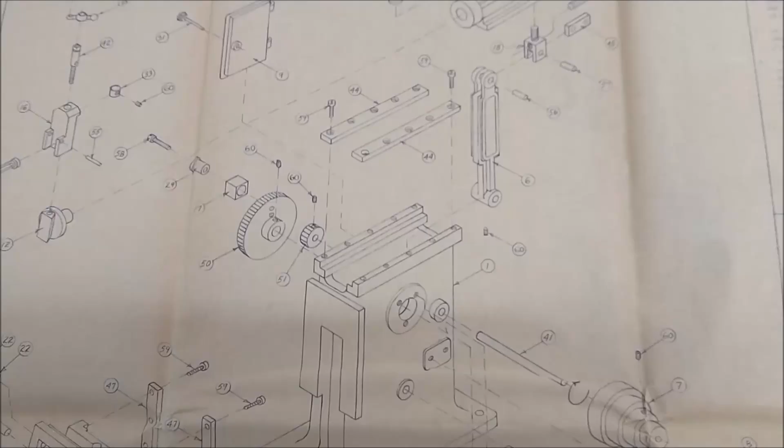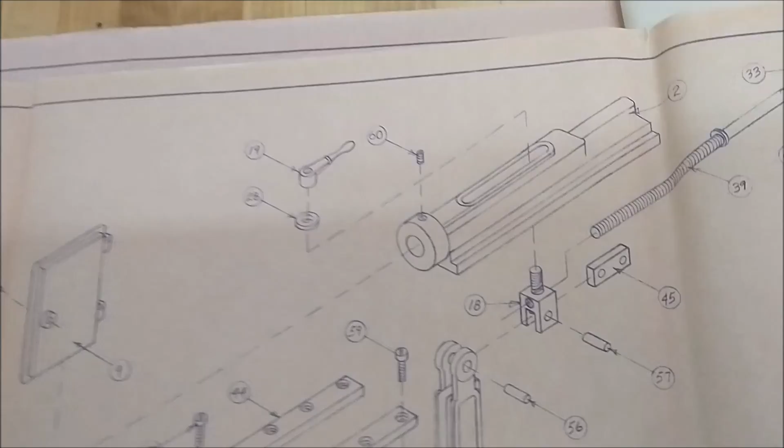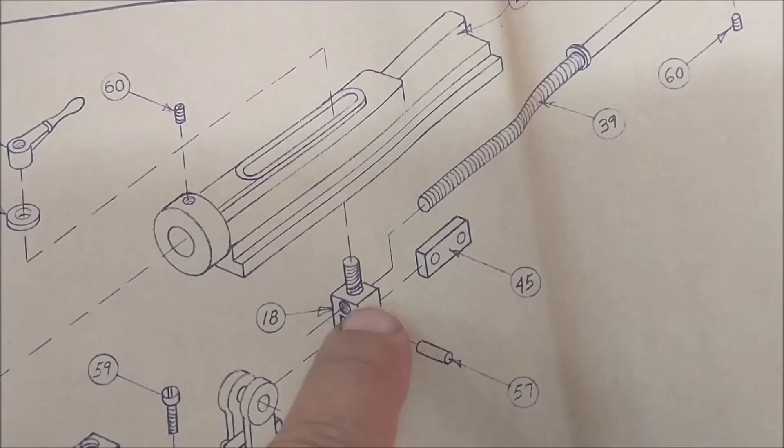With all of the crank arm linkage, all the gears, everything needed to make this piece go back and forth, we need to do something to tie this to that, and that's all this little stuff right here. I think that's where we're going to go next. First piece I'm going to do is part number 18. It's part of the ram linkage, made out of brass, 1/4 inch square, with a 5-40 thread through it and on top. I'm going to set that up in a vise, do the cross hole and the slot and this hole first, put it in a collet, and we'll turn and thread this on the lathe. Let's do it.

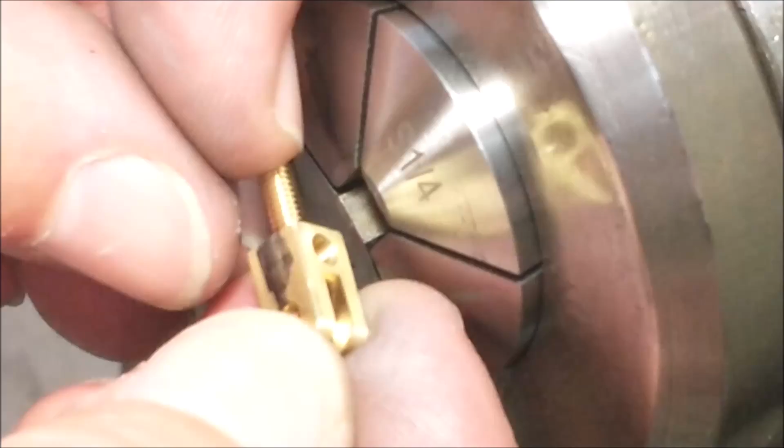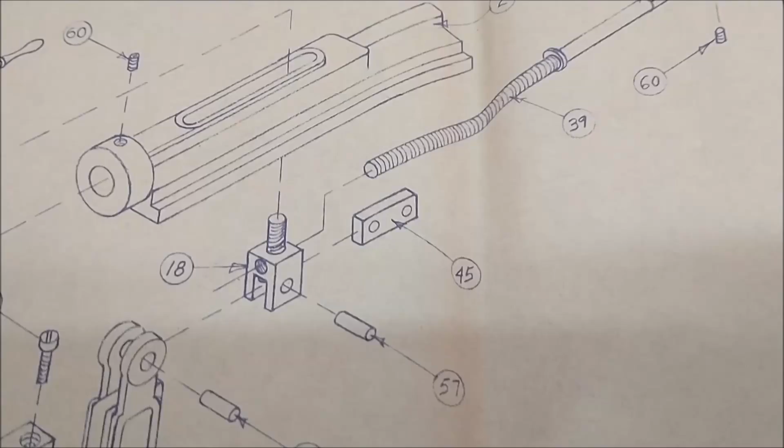Next piece in line, number 45. It's the link. Not a very complex part, but it does present a couple of holding difficulties if you want to do it all at one time. I think you're going to like the way I do it. Let's take a look.

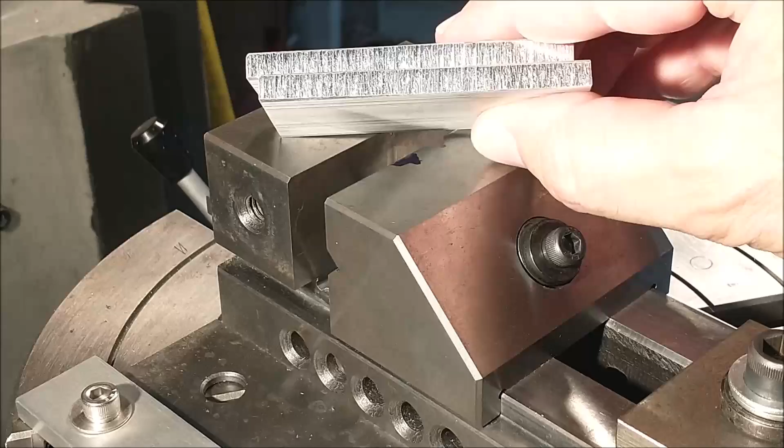To do this little part, I'm going to make some more soft jaws. You've seen me do this before on other projects, but I'm going to do this a little differently because I want to hold the part a little differently. I want to machine these so that when they're machined, they're just a little bit below the surface of this vise.

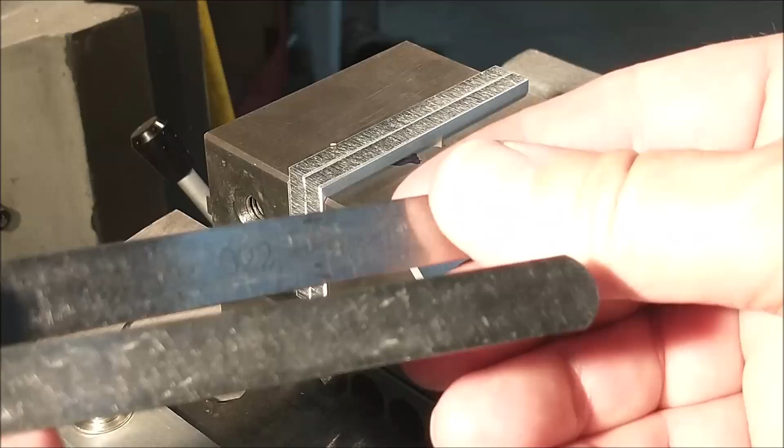I'm going to do that by using feeler gauges. One's 22 thousandths. I'm going to put that underneath the parts. Let's torque down on them now.

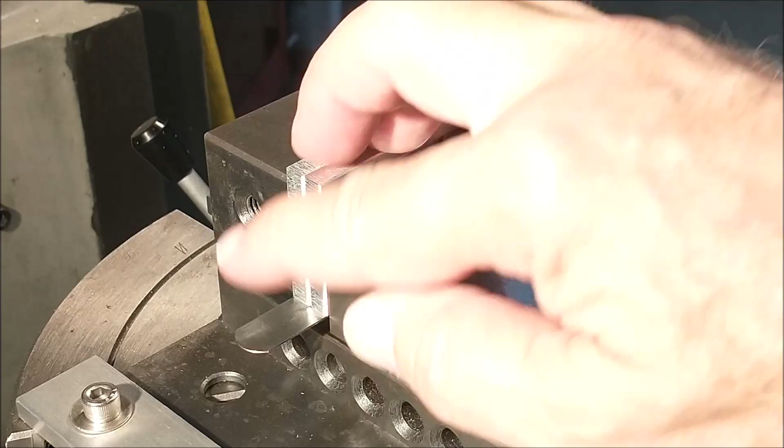By doing what I just did, I effectively know that this surface, when I pull that parallel out, is going to move down 22 thousandths of an inch. I'm going to take the 20 thousandths shim and set the height of the cutter I'm going to use to deck these off with the 20. So when this is done, it'll be 20 thousandths above this surface. Open the vise, pull the shim, and the top surface will now drop to 2 thousandths below this surface. Easiest way I know how to do it.

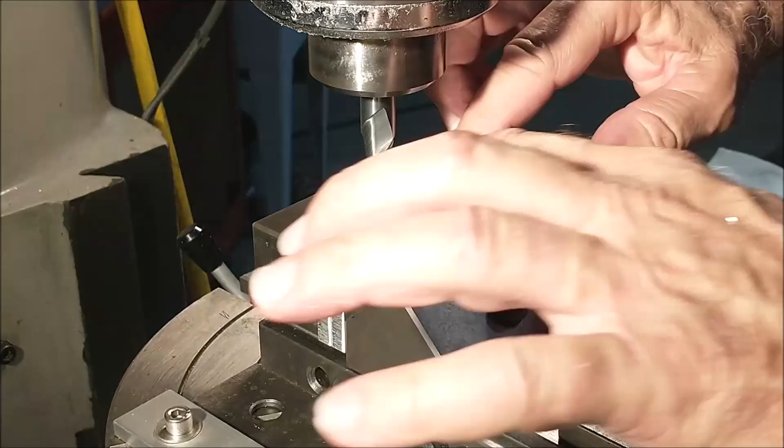Let's pull out the 22 thousandths shim on the bottom. I will remove these and deburr them, but just for sake of demonstration, at this point, let's pull the shim. The surface of these two parts is now 2 thousandths below this surface right here, and you can trust that. That's important in an upcoming shot, so bear with me for a second. I got to cut a little piece of material to squeeze in there. I'll be right back.

After a little deburring on the surfaces I just cut, I'm going to put them back in. Open the vise. A little bit thicker than the part I'm going to stick in there. This is the part I'm going to stick in there, but I have to drill through it, so parallels are kind of out of the question. I could put a step in these jaws, you've seen me do that before, but I'm going to do this a little differently.

Magnet. Doesn't get much easier now, right? It is now level with the top and front and rear jaws. These are out of the way. It should be straight, and as I close it up, the magnet slides. All is well. The reason these are lower than the jaws is so that it doesn't pop open if the pressure is above the clamping surface. You only need a couple thousandths of an inch, so there you go. I'm going to squash down on it. Oh, take that out. Now I have a part that's sitting in there perfectly flat and level.

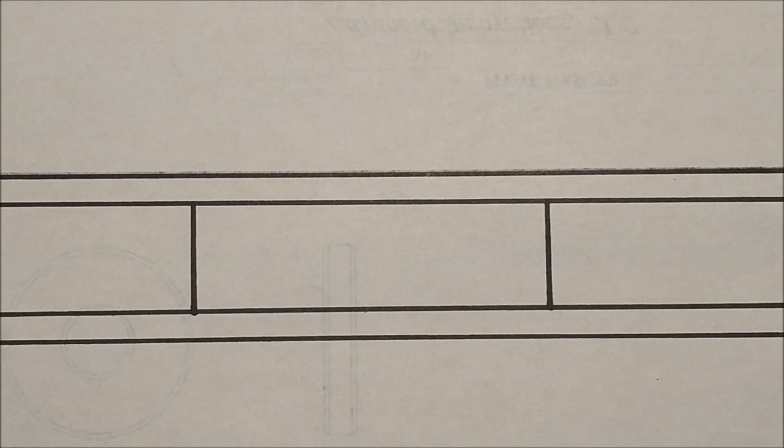There's the part. Once I put it in and positioned it with a magnet, I know it's flat. I also know it's oversize in length. So when I come in and hit that part with my end mill, I'll put a 0 on my digital readout. If you don't have a digital, put a 0 on your dial. Right now, let's call this X0.

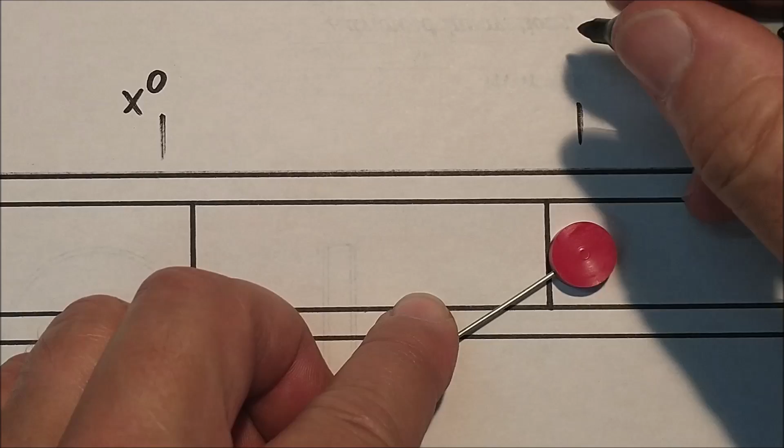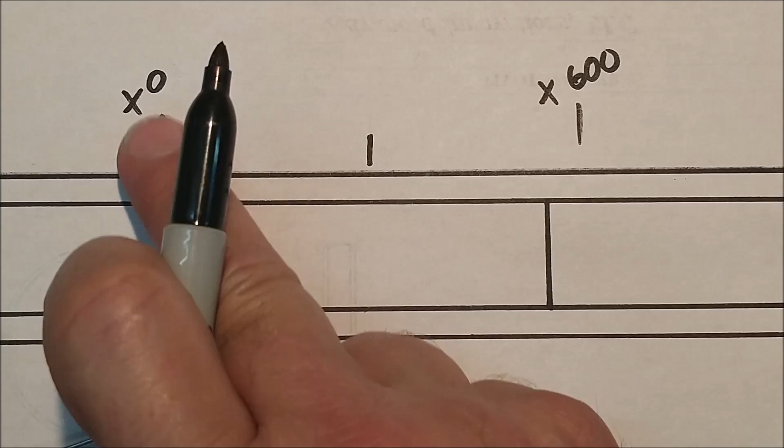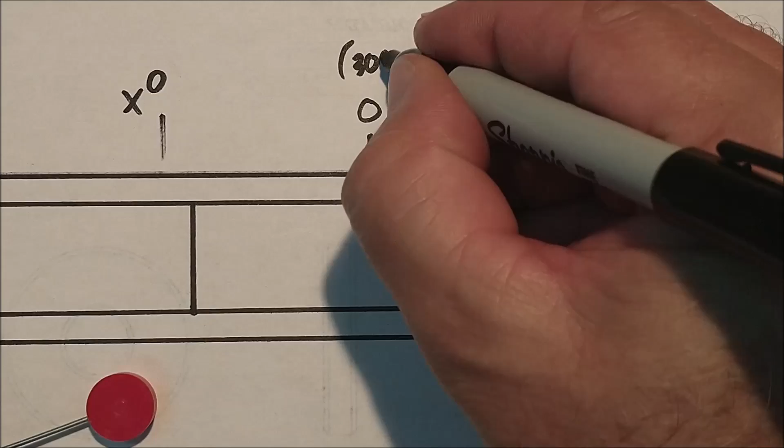When I move over to this side and touch it, let's say this is now X600, for lack of a better term. I know that X300 is right in the middle of this part. The centerline feature on a digital readout: when you hit 0 and come over, a second value shows up, and hitting the centerline automatically zeroes that point for you. If you don't have a centerline feature, crank it back to half of what you've got, and now you have your 0, or the 300 point, in the part. That is the center of the blank along the x-axis, not the y-axis.

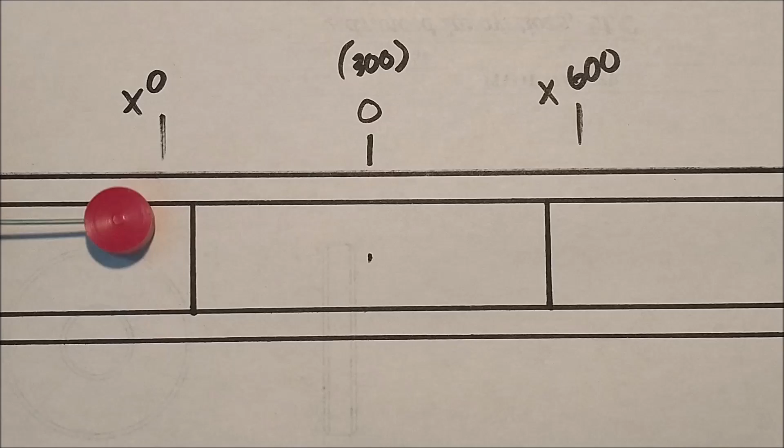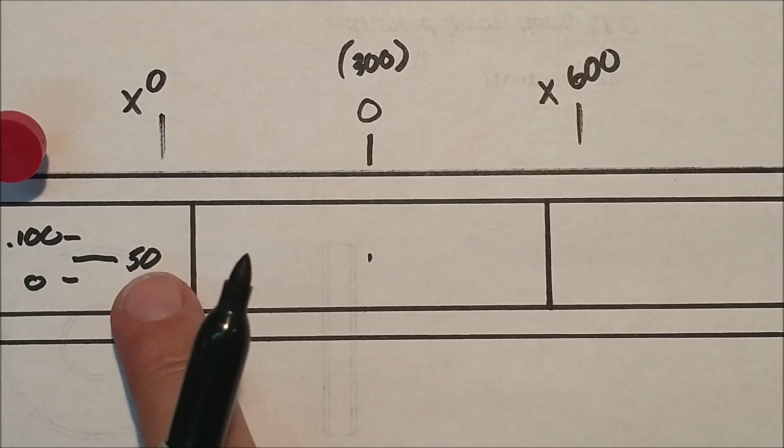Now, since I had aluminum nests in the jaws, I was able to take a bump and a bump and a bump. Let's say the bump here is 0, and the bump here is 100. I come back to 50. I could also use the centerline feature for the y-axis, which now makes this 0. And there we go—the center of the part is now located without ever having touched a piece of measuring equipment.

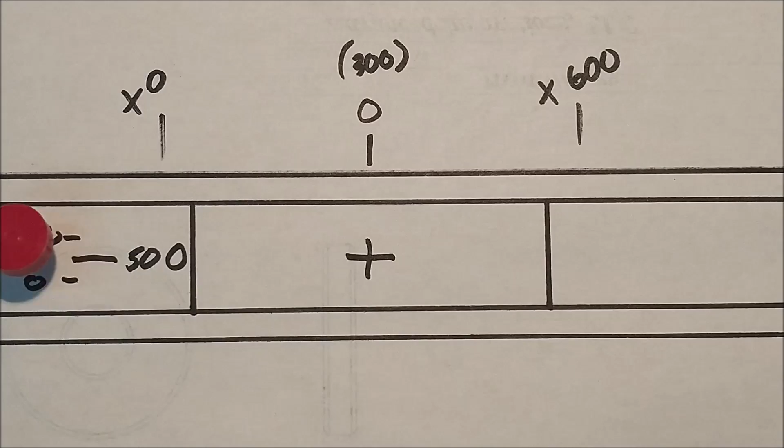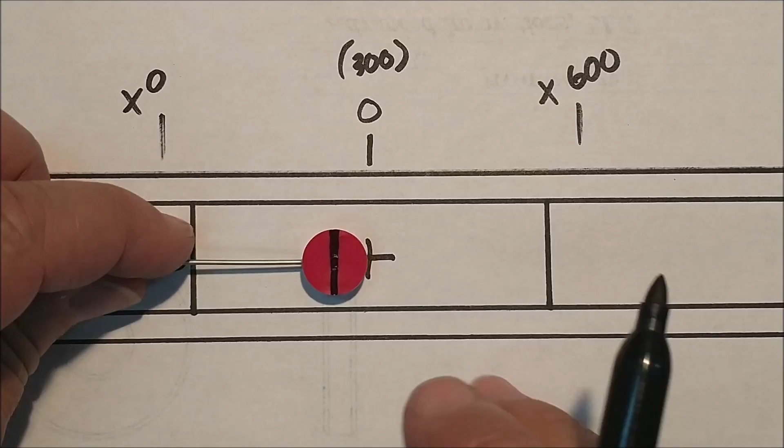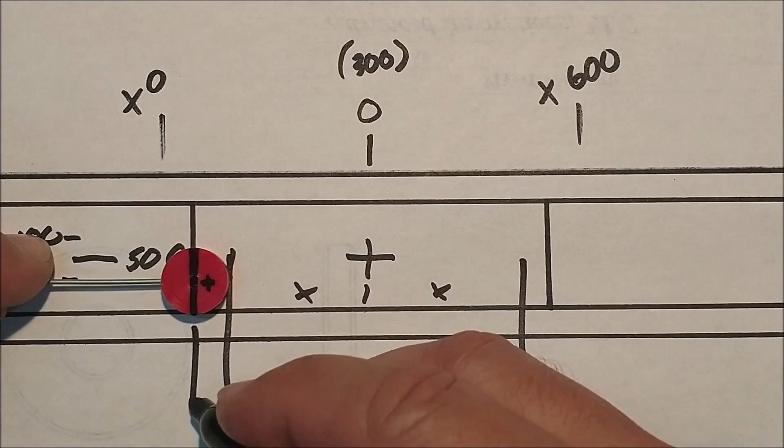Now, by knowing the center and the radius of the cutter, I'm going to draw on this—look at that. You take the overall length of the part, which is here, half the part plus half the cutter, and these are your new values. When you make the cuts, the part will be to print.

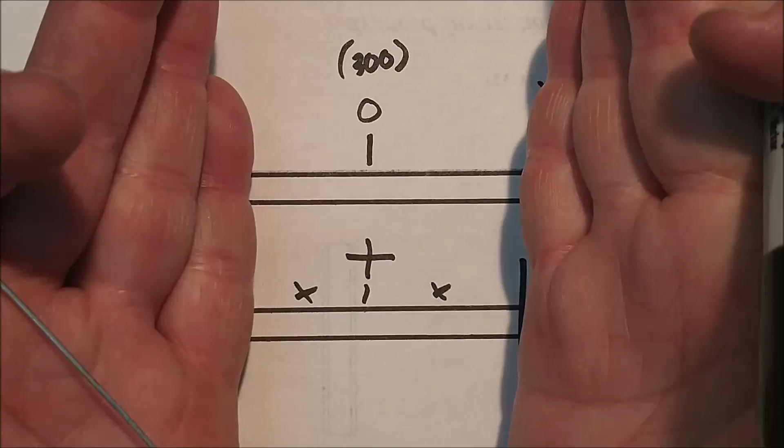Additionally, with your 0,0 having been determined by bumping the nests and bumping the end of the part, not only is the part to length once you know the diameter of your cutter, but you can use this location as the central reference for the offset for the two holes. And since it's suspended between two aluminum blocks, you don't have to worry about encountering any parallels below the part.

So if you don't have a sacrificial piece of aluminum or something under this to drill into, the magnet gave you the flat, and the aluminum gives you the ability to saw, cut, or mill the ends off to length.

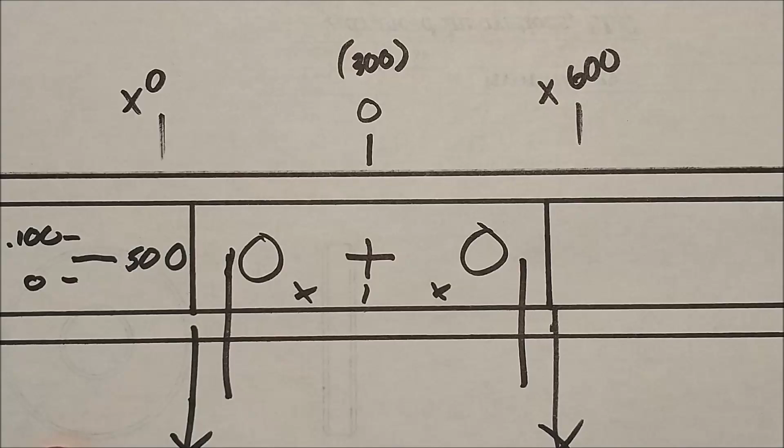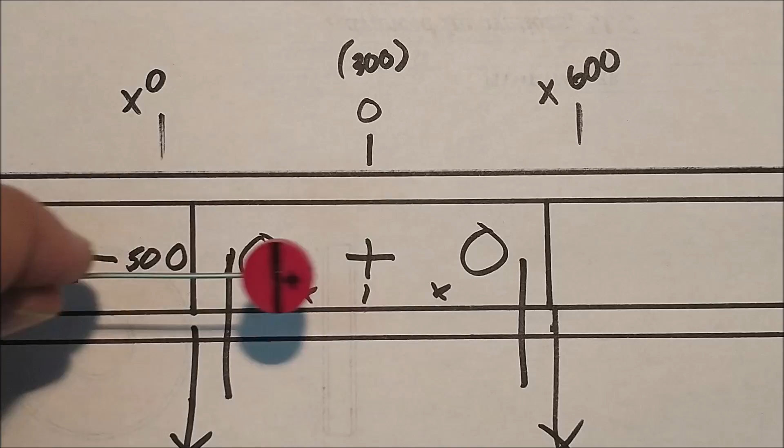All right, now that everybody is completely confused, you can roll that back and look at it again. Bump, bump, center. Bump, bump, center. 0, 0. Mill, mill. Drill. Done.

Camera is now behind the machine on the left-hand side, so I'll be standing on this side of the cutter. What I'm going to do is take this cutter, bump each end, set a number, come over here and bump that one, hit the centerline feature on my digital, and that'll give me the middle. Knowing the diameter of the cutter, I can offset equally and come up with the overall length of the part based on the cutter diameter.

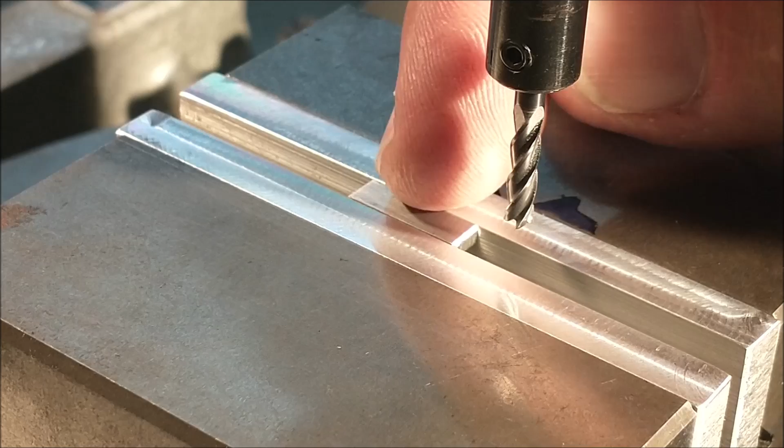So I'll add the radius both ways, or half the overall length both ways, plus the radius of the cutter, for my offset to give me the length. I'll probably do the same thing for the inside—just touch the jaws front and rear with the cutter, zero out, find the centerline, and complete the part without ever measuring it or touching anything. Just cut the part.

Overall length of the part is complete. I'm going to bump the insides of the jaws to set my y-axis 0, and that'll give me the centerline for the drilled holes.

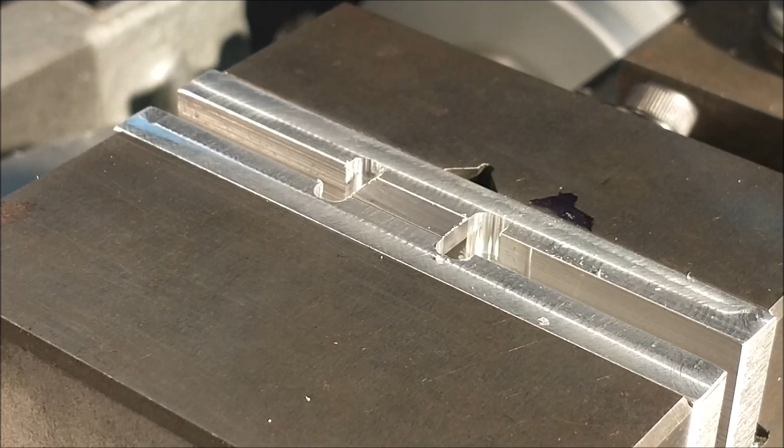Now, I was asked recently about the speed differential between drilling and reaming. For the record, when I'm on the mill and I've just drilled a hole, all I do is throw my machine into low gear to ream it. I don't mess with the speed range at all. It's worked really well for a long time, and I'm not going to change my technique now.

So no speed differential on the dial, just going into low gear for this. On the lathe, I usually cut the speed in half. It's just easier on the high-low on the mill.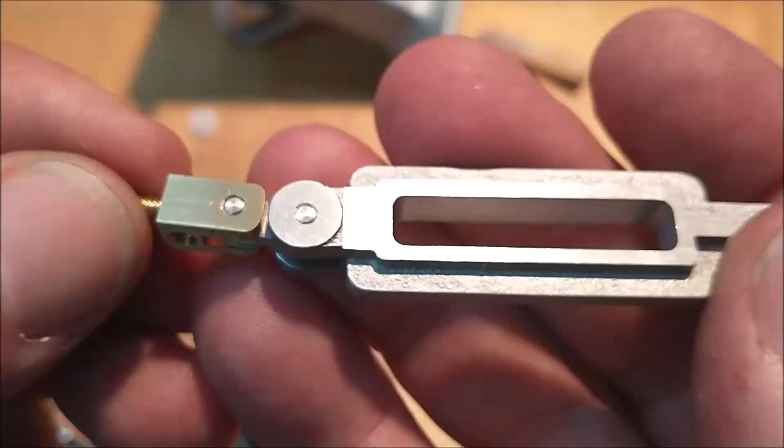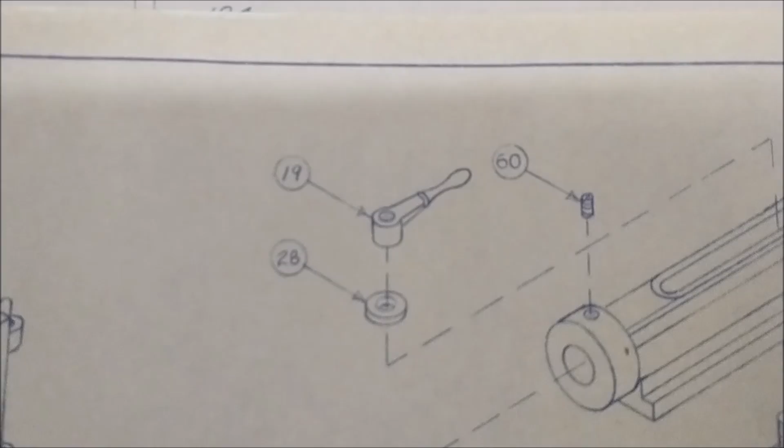Next piece in line, number 19—the little ram handle that controls the stroke of the ram. Initially it looks like a scary little part, but I've got a plan. I think this is going to go pretty easy. Let's check it out.